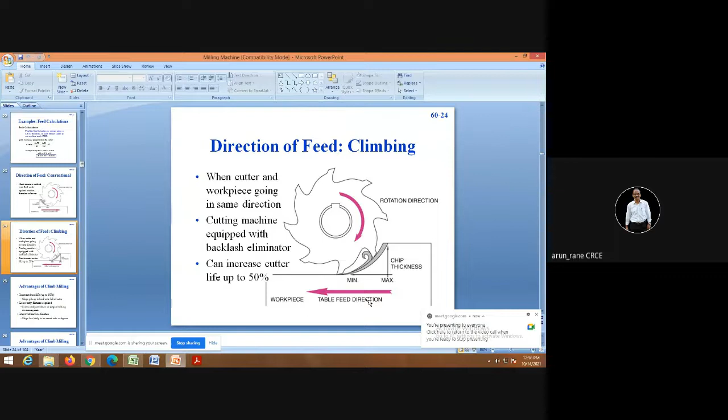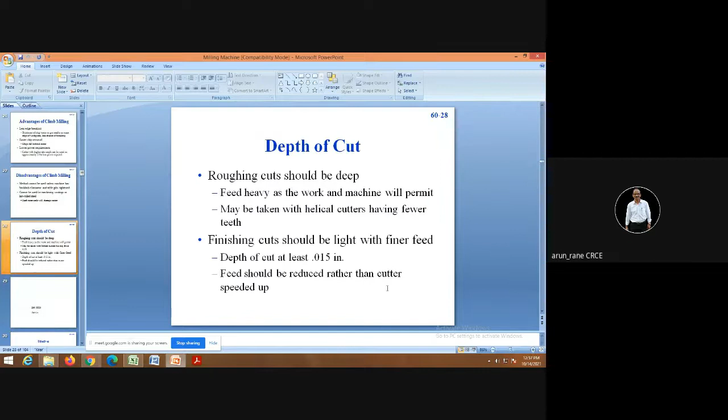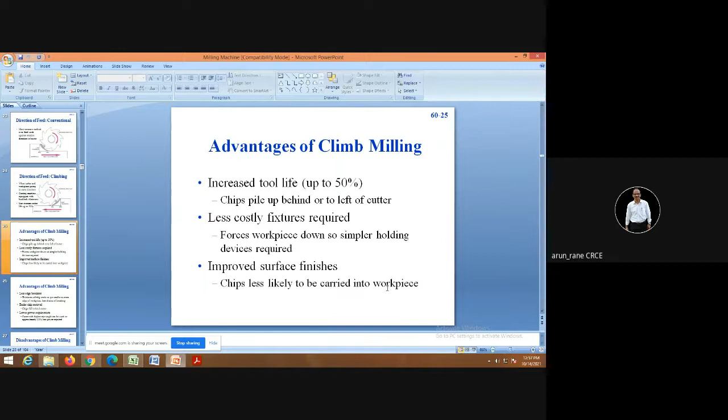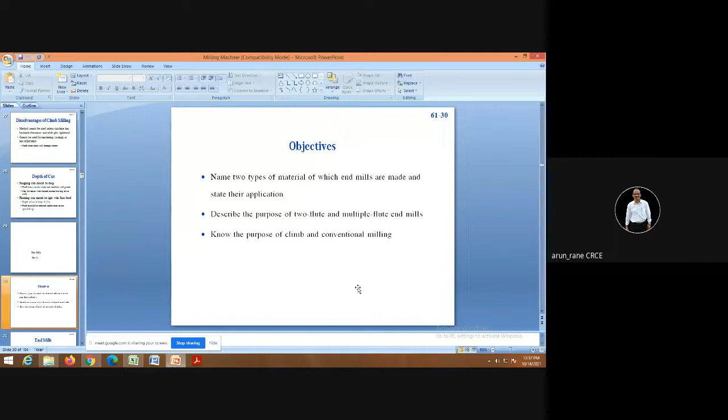We also discussed about the advantages of climb milling. As I told you, conventional milling is called up milling and climb milling is called down milling. So conventional milling is up milling, you have to remember that properly, and climb milling is nothing but down milling.

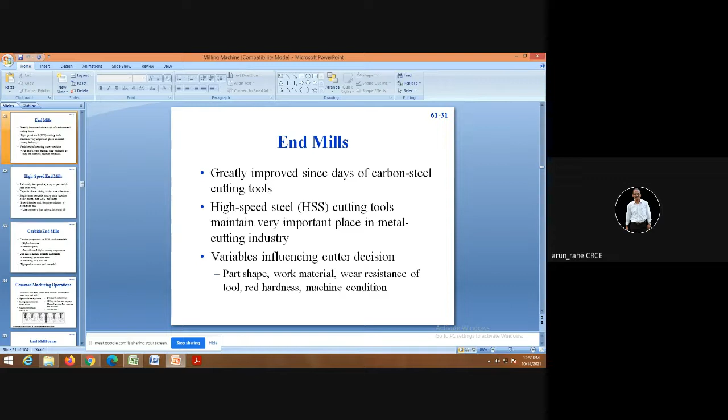These are the various cutters now. The very first and commonly used popular cutter is end mill. End mill is available in 2 flute and 4 flute construction, and the material also varies from medium carbon steel, high carbon steel, carbide, coated, etc.

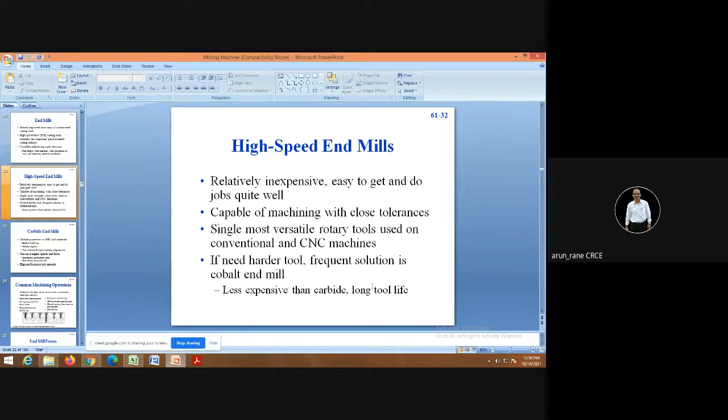Carbide end mills, again, can be completely solid carbide end mill or just coated end mills. Cost of the coated end mill is less as compared to solid carbide, because when I say solid carbide, the complete body is made out of carbide, generally tungsten carbide or titanium carbide. And when I say coating, that means the body is made out of high speed steel with a coating of carbide.

Usually the coating is of the order of 5 microns to 10 microns maximum, and it enhances the tool life as well as allows you to employ more cutting speeds and feed rates. These coatings are provided by PVD and CVD, that is physical vapor deposition and chemical vapor deposition. These are the two techniques used for coating.

So this is an option to reduce the cost. Balzers from Pune are the reputed coating tool manufacturers. There are many coating tool industries in Mumbai also, and even small scale and medium scale industries have set up coating plants.

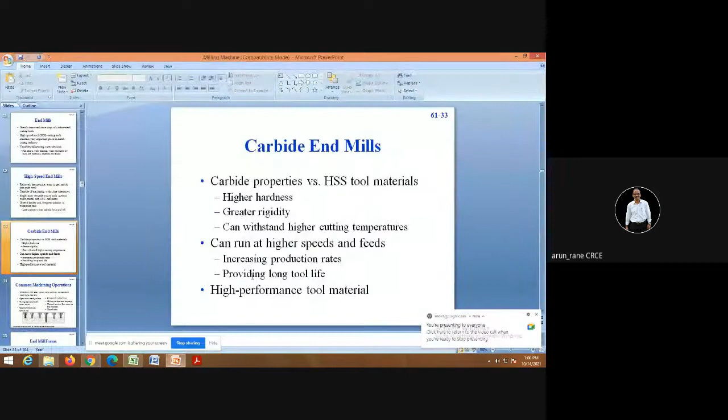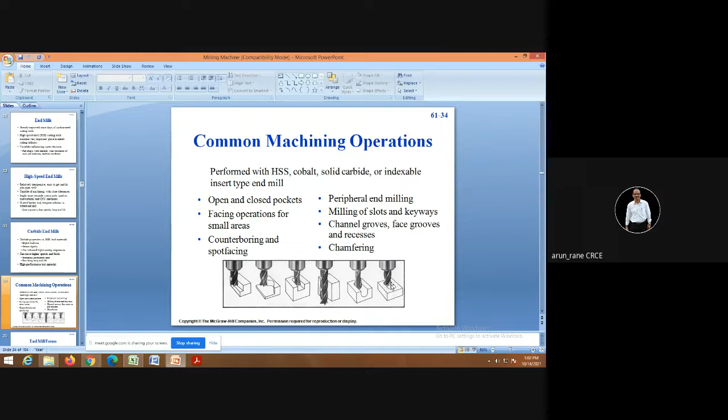There are different end mill forms, basically depending upon the surfaces to be milled. The two forms are ball nose end mill and bull nose end mill. Try to understand the difference between ball nose and bull nose cutter.

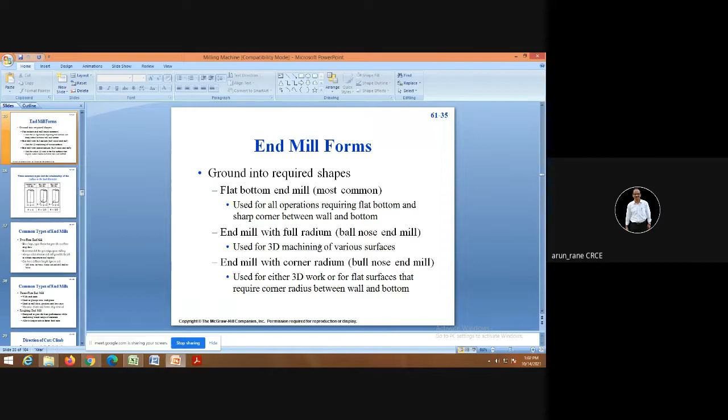In case of ball nose, the complete diameter is provided with the radius, and in case of bull nose, only the corners are provided with the radius. So this is the difference.

This is your standard flat end mill. This is ball nose end mill. And this is bull nose. So in case of bull nose, the radius is given at the corner. In case of ball nose, the complete diameter is provided with the radius, and flat end mill is perfectly flat or sharp.

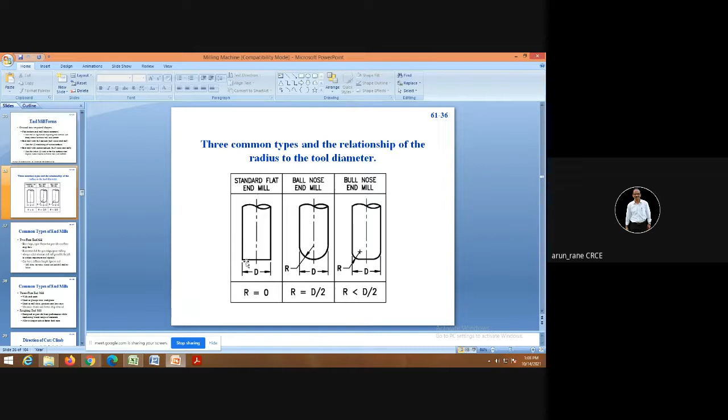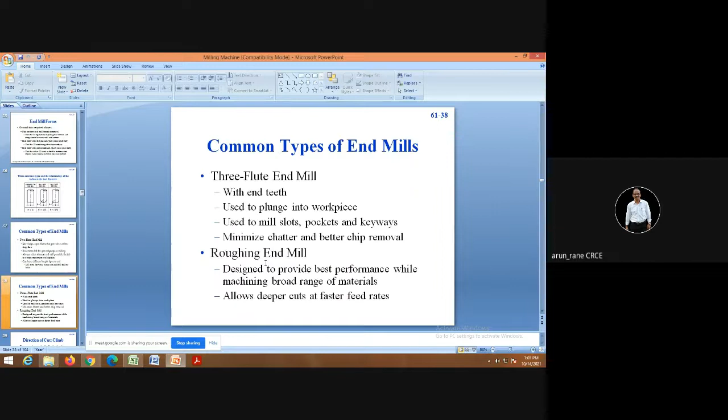These are the common types of end mills, that is 2 flute end mill, 3 flute end mill, roughing end mill, 4 flute end mill, etc. As I told you, there are two types of milling, that is climb milling and another is conventional milling.

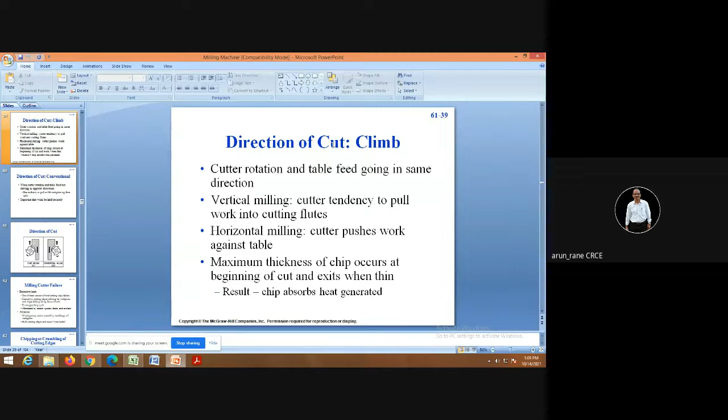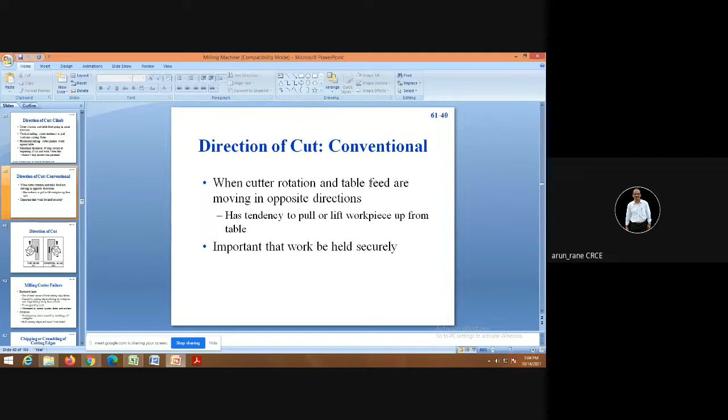Conventional milling is termed as up milling. These are the codes, G41 and G42, which are used in CNC. Now let's look at climb milling and conventional milling.

In case of conventional milling, the cutter will tend to lift the workpiece, so here the clamping has to be strong. Conventional milling is also called up milling.

This is climb milling, also called down milling. In down milling, the cutter will tend to sit the workpiece, so clamping requirement need not be strong.

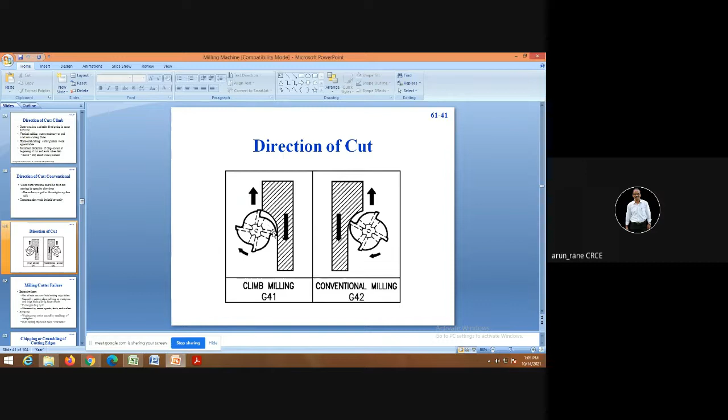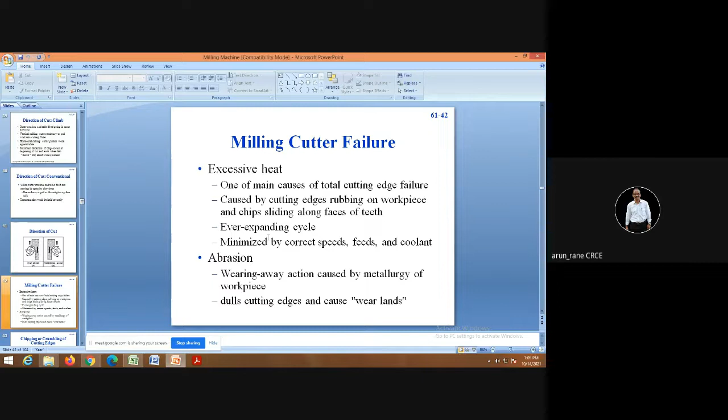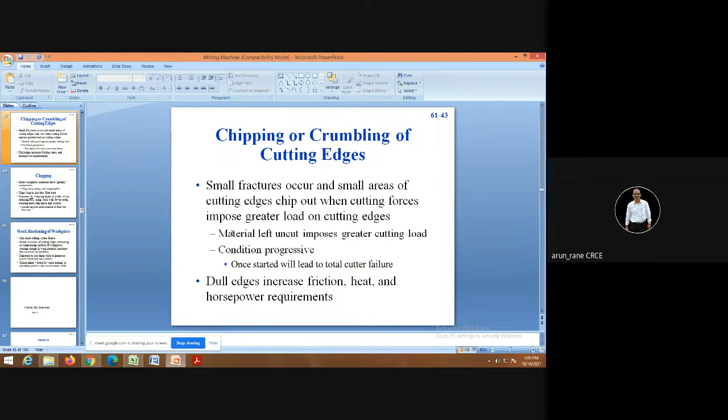Milling cutter can fail because of higher depth of cut, higher feed rate, higher cutting speed. All this will lead to excessive heat, abrasion, and cutting edges will get chipped off or crumbled. Once the cutting edges become dull, it will cause a lot of friction, develop heat, and consume more power.

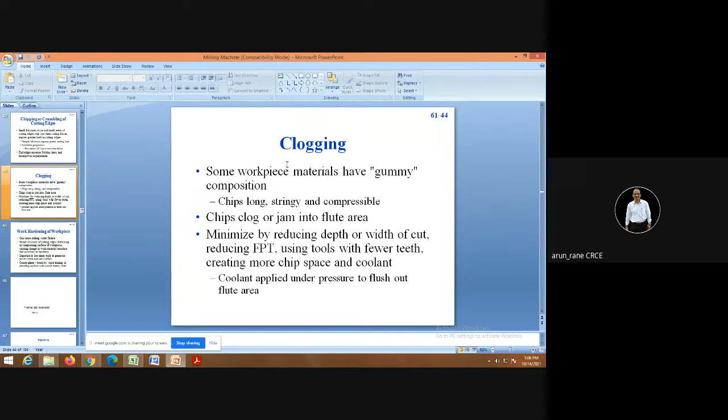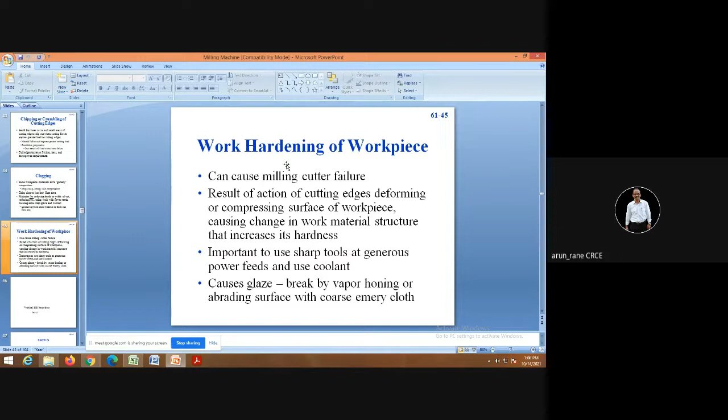The cutting edges also get clogged because of the chips, if the chips are not blown away properly with the coolant. That's why it is very important that chips should be flushed away properly, hence the coolant is required. The chips should not be embedded in the cutter.

Again, there are some alignments which are necessary. Most of the alignments are factory set. Like in case of vertical milling machine, the vertical head should be pakka 90 degree to the table surface. There is nothing like 0 0, you cannot have 0 0 in this universe, so it should be within 0.02 millimeter.

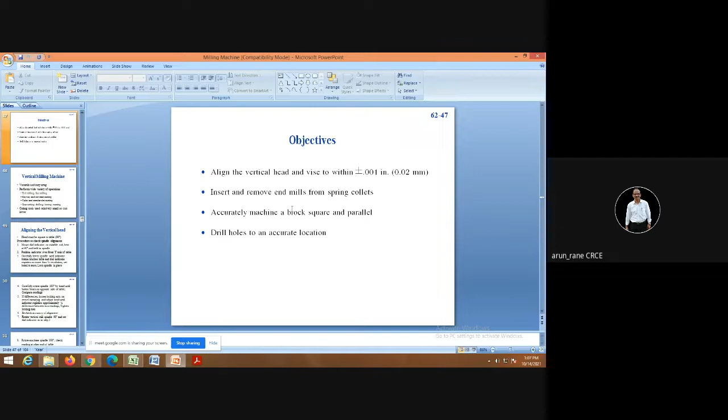Vertical milling machine is versatile, and you can do many operations. So in most setups, workshops or machine shops, the use of vertical milling machine is common.

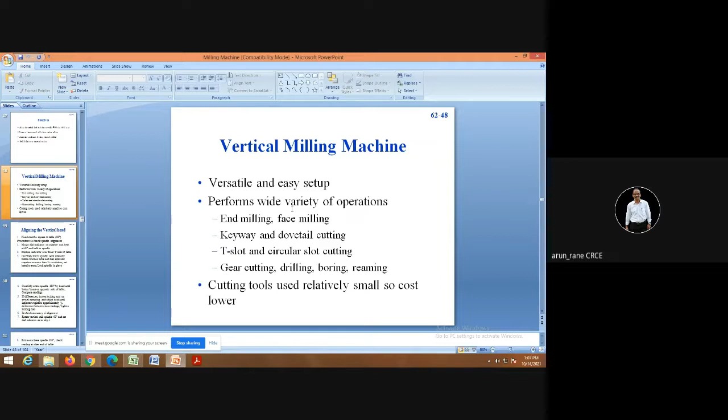So how to align the vertical head? You need to hold a mandrel in the spindle, and with the help of the dial indicator you have to move up and down and check the deviations. It should not be more than 0.02 millimeter.

Usually the vertical heads are factory set, but sometimes accidents happen, people dash the machine, and in that case the alignment goes and you need to realign. So either you can do it yourself, or you can ask maintenance people to carry out the alignment, or the last option is you can call the manufacturer's service engineer to do the alignment.

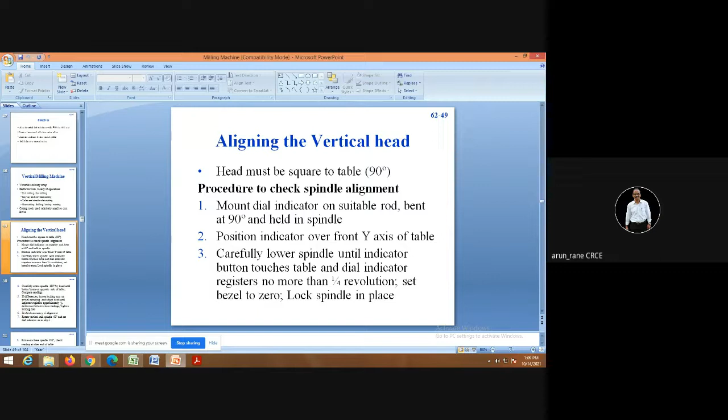So this is the procedure to do the alignment. Vice is used to hold a workpiece on the milling machine, and the vice face also has to be aligned. It should be parallel to the feed direction.

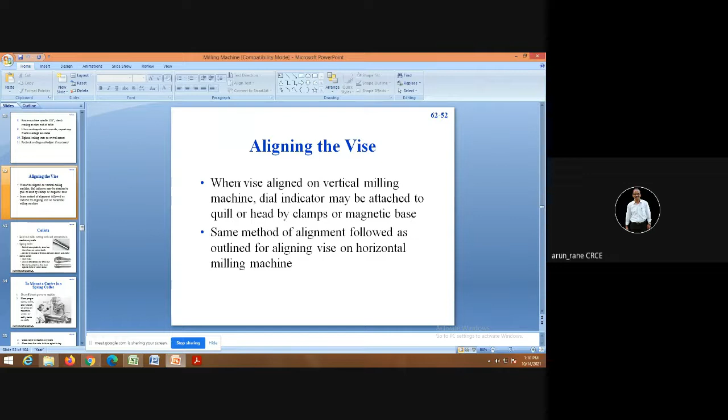Collet is used to hold the end mill, and collet gives a good grip across the circumference - that is one advantage. Another advantage is the cutter becomes concentric to the spindle axis - that is the biggest advantage. So you don't have to true the cutter.

Now you should not be confused. The collets are used to hold the cutters in case of milling machine, whereas in case of lathe machine, the collet is used for holding the workpiece or the round bar. The collets can be round, square, or hexagon, so it can hold a round bar, hexagonal bar, or square bar. In case of milling machine, again I am telling, the collet is used for holding the round cutters, majorly end mills.

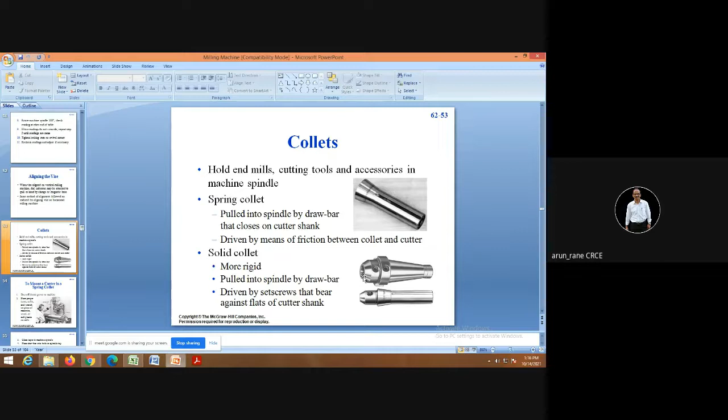Another disadvantage is that it cannot take variations in the cutter diameter. Like in spring collet, if I purchase the 20 dia collet, it can accommodate 19 to 21 mm variations, whereas solid collet can accommodate only the same size. Like suppose if this is 20, then it can take only 20 mm. If you try to fix up the 19 dia cutter, there will be a clearance of 1 mm, and your cutter will be out by 0.5 mm, 1 divided by 2. So your cutter will not be exactly in align with the axis of the spindle, it will be out by 0.5. So that is the disadvantage; side lock cutters or solid collets are used for the exact diameter of the cutter.

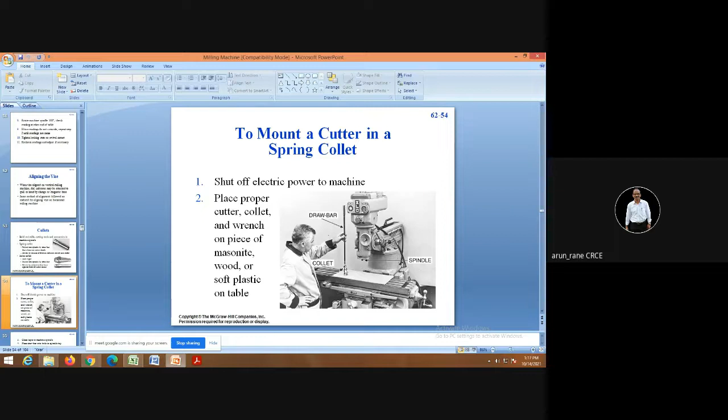How is the collet held? There is something called the drawbar. This is the collet which is threaded from the back side, and you have a drawbar to be inserted from the top, while the collet is inserted from down in the spindle. So the collet has threading here and the drawbar also has threading here. This threading goes inside the collet and holds it powerfully. And in the collet, as you know, the cutter is held. The purpose of the spring collet, or round collet, is to have a grip across the entire circumference.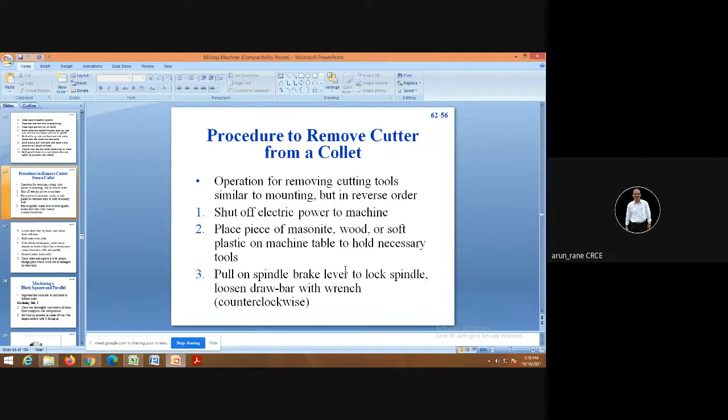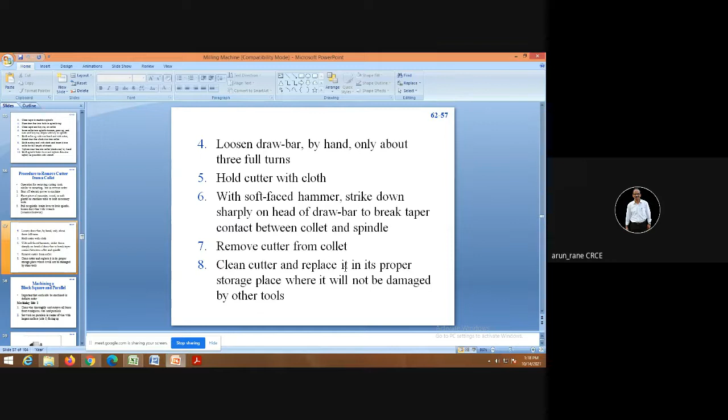Then if you want to remove the cutter, you have to adopt the same procedure: loosen the drawbar and hold the cutter carefully so that it doesn't fall on the workpiece table. Because if it falls on the table, or if you try to hold it by hand, your hand may get damaged or the table may get damaged, and obviously the cutter's cutting edges will also break.

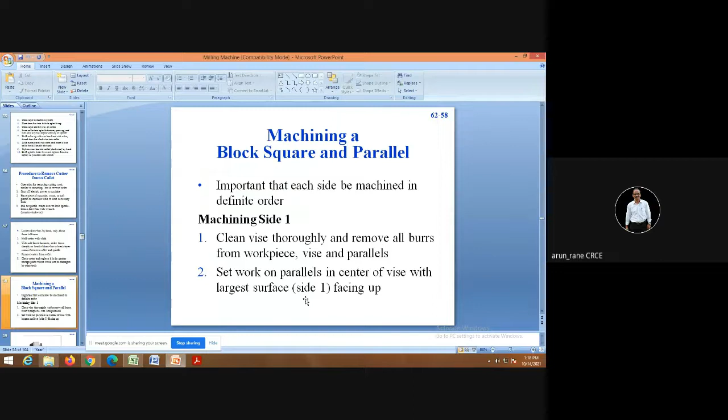The most basic or preliminary operation is how to square and make the faces parallel of a block. So these are the steps: you machine side one first. First, of course, you have to clean the vise, mount the vise, then align the vise properly. So this is step number one.

This is the workpiece which is held here. So first you face this. Then in the second step, you take this workpiece, align it here, and then mill this. Now what is happening is that this surface and this surface will be exactly 90 degrees to each other, because you have already aligned this face - this is the fixed face of the vise - and it has been aligned properly. So obviously this face will be perpendicular to this.

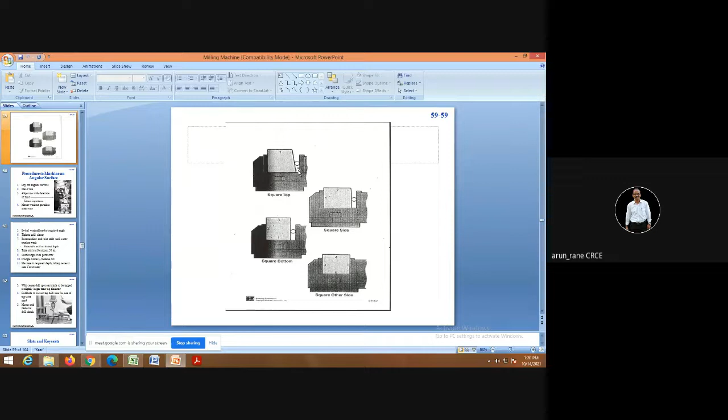Now once this is machined, coming to the third phase, we are doing machining from the top face. So now this face will come exactly parallel to this, because this is already machined, and this face will come 90 degrees to this face. And then now the last surface - here the reference is taken of this face and reference is taken of this face. So these two references have been taken.

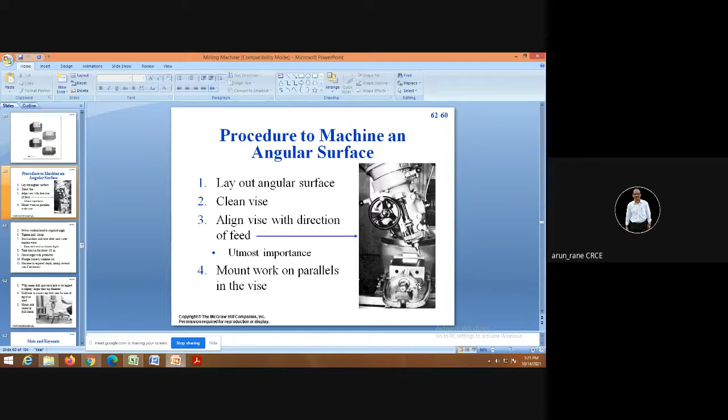How to machine an angular surface? There are two ways to machine the angular surface - meaning how to machine the surfaces at an angle. One way is you can tilt the head as shown in this diagram. Another way is you can tilt the vise, for which you need a universal vise. So there are two ways: you can either tilt the head or tilt the vise.

So you have to observe a very high degree of discipline, because an accident will happen only once, but it will cause damage to you. So you should be extremely careful.

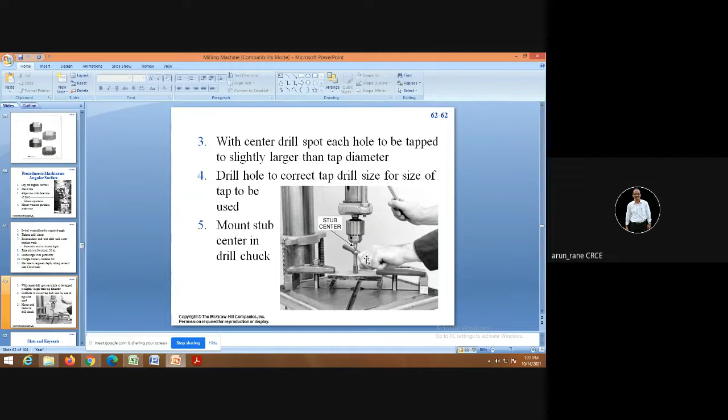Another operation which can be done on the milling machine is slot cutting and keyway cutting. There is a difference between slot and keyway. Usually keyways are blind, and of fixed width and length. It doesn't run through and through across the workpiece.

Through and through means, suppose if this is a 100 millimeter long workpiece, through and through means the keyway will run through entirely - that is not called keyway, it is called slot. Keyway means if this is 100 long, the keyway will be around 50 mm or 60 mm.

Now what will be the limitations? Keyway cannot have square ends at both sides. Whatever the cutter diameter, suppose if the cutter diameter is 20, you will get a radius of 10 at the end, whereas slots are through and through, so you will not get any radii at the ends.

So from a manufacturing or machining point of view, slot milling is always faster or more economical.

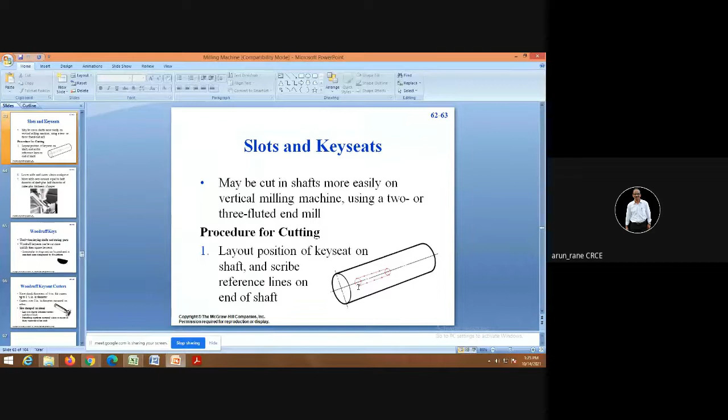This is how keyway milling can be done. You are holding a shaft in a vise - the shaft is mounted on a V block, and it is done with the help of an end mill.

The only problem is at the ends you will get the cutter radius. So accordingly you have to design the keys - the key will also have radius at both ends, or you can have the key length shorter, that is, you subtract the radius from both ends. For example, if the keyway length is 50 mm and you are using a 20 dia cutter, then 10 mm is lost on both sides, so you can have a key of 50 minus 20, that is 30, or 25 mm.

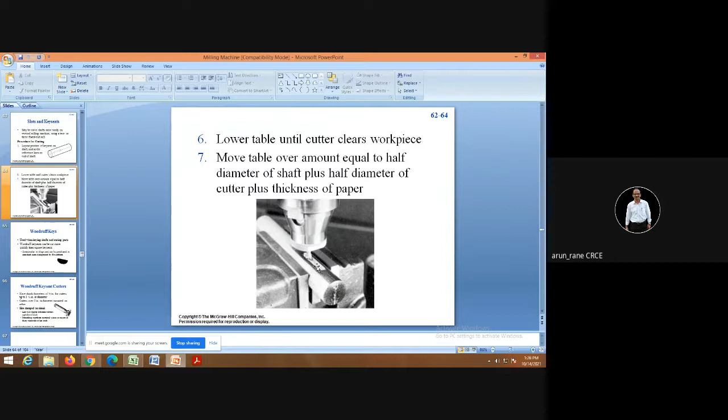Woodruff key is used for alignment. We have seen the application of the Woodruff key on the lathe machine in tool post when you have to align the tool center and the workpiece center.

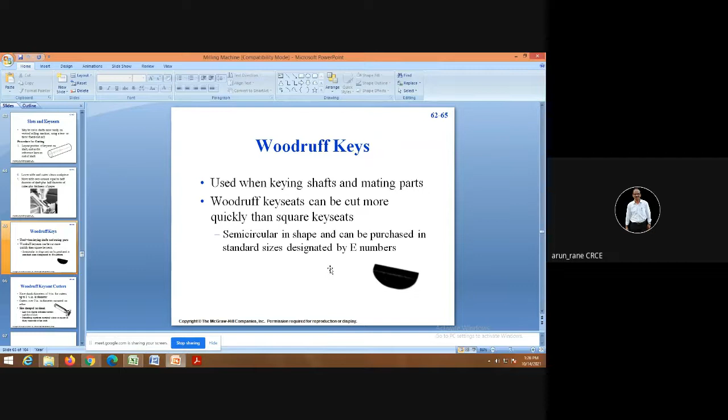Woodruff keys are preferred. How to cut the Woodruff key? It can be cut with the help of a T-slot cutter, commonly called a Woodruff cutter, or also called the Woodruff key seat cutter. This is how a Woodruff cutter will look like.

Either you can choose a vertical milling machine or horizontal milling machine, depending upon how you are going to mount the workpiece.

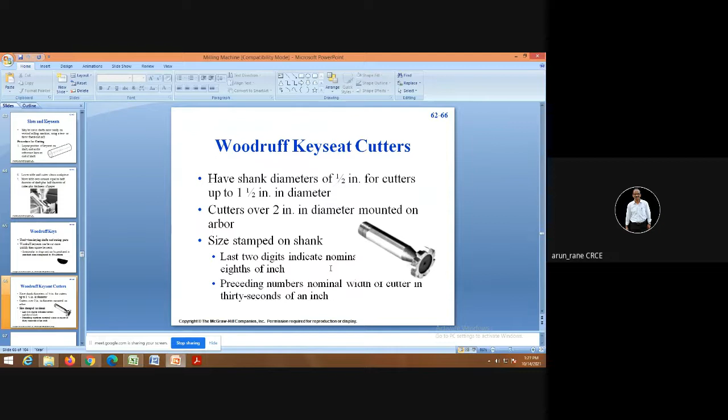Again, from an examination point of view, the questions that can be asked are: describe the types of milling machines, describe the various operations which can be performed on a milling machine, what are the different cutters used on milling machines - everything is included in this PPT.

Another question which can be asked is, what are the different accessories used on the milling machine? Because next to the lathe machine, the next popular machine is the milling machine. Of course, the lathe is called the mother of all machines because it can do turning, milling, grinding, drilling, slotting, gear cutting - almost all operations, obviously with the help of attachments.

Whereas on a milling machine you can also perform various operations, but it has limitations - like turning, you cannot perform on a milling machine very easily.

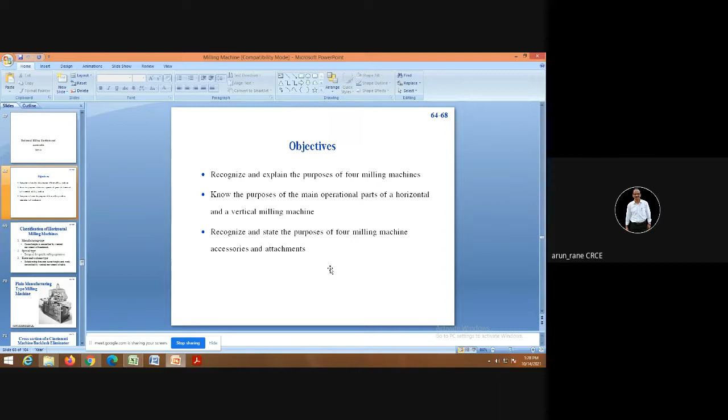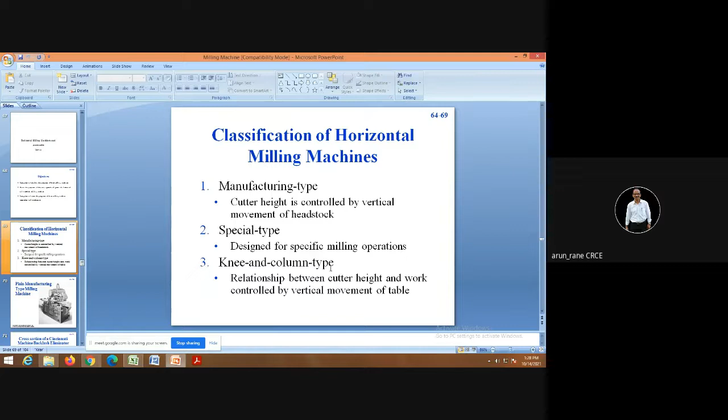How to classify the different horizontal milling machines? It is based on manufacturing type, special type milling machines. Knee and column type milling machines are most commonly used in workshops.

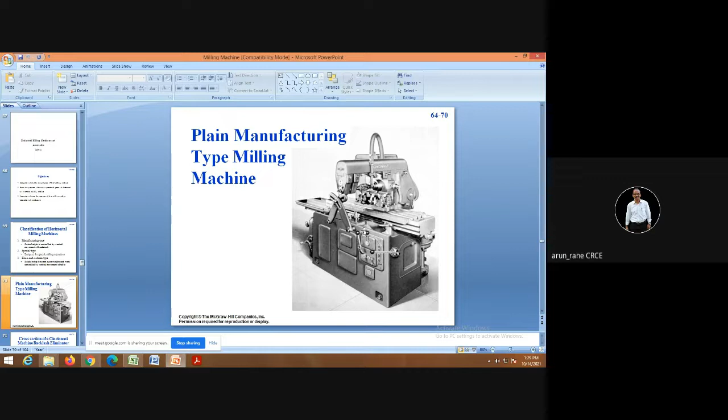There is something I call the backlash eliminator, that is used while doing down milling, because in down milling operations the cutter tends to seat the workpiece, so the clamping force required is less, but there is a tendency to pull the screw because of the backlash.

In order to reduce or eliminate this backlash, of course you cannot make backlash zero, because if there is no play between a screw and nut, there will not be any movement, it gets locked. At the same time you should not have more backlash, because then the movement will be loose. So you should have a proper backlash.

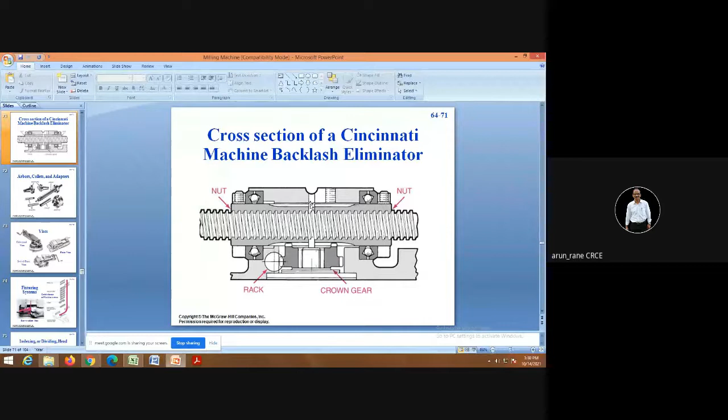Excessive backlash can be prevented by a backlash eliminator, a device that comes as an accessory which needs to be provided on the milling machine, especially when down milling operation is performed.

These are different accessories like the arbor, used mostly on horizontal milling machines. These are called adapters, used for mounting face mill cutters. Adapters come in two tapers, ISO 40 and ISO 50. These are the commonly used tapers, also called BT 40, British tapered, or BT 50.

These are sleeves, generally used for the drill chuck. Suppose the drill chuck has one taper, but the milling machine spindle taper is bigger - how do you bridge the gap? That can be bridged using sleeves, which act as an intermediate piece between the drill chuck taper and the spindle taper. You mount the drill chuck in the sleeve, and the sleeve with drill chuck goes as one piece inside the machine spindle.

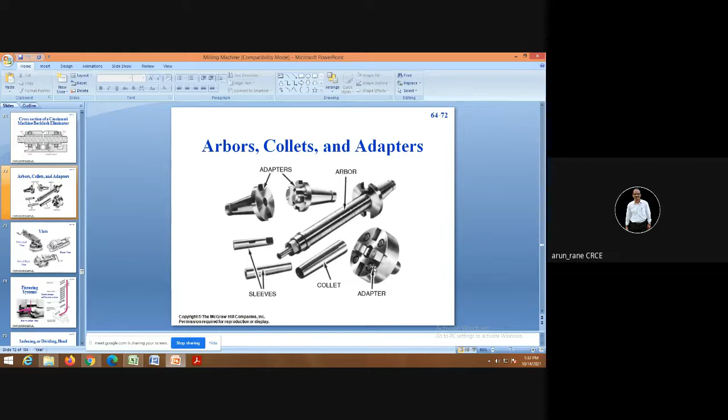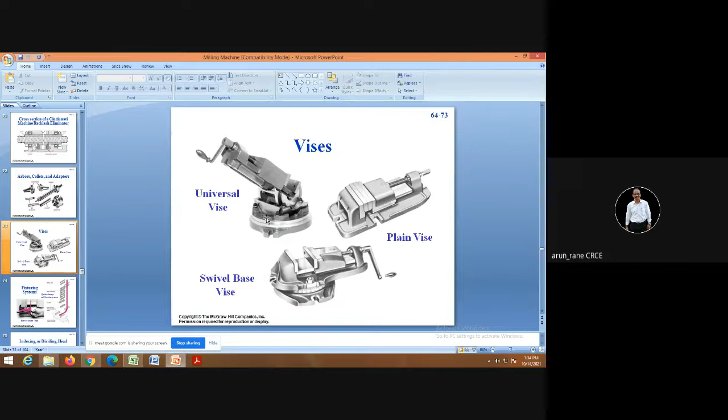Look at this - here the vice can be rotated about this axis. Then it has two more swiveling bases, one here and another here. So all three planes - XY, XZ and YZ - it can be rotated. Machining at any angle, not just one angle but two or three angles simultaneously, can be performed with the help of a universal vice.

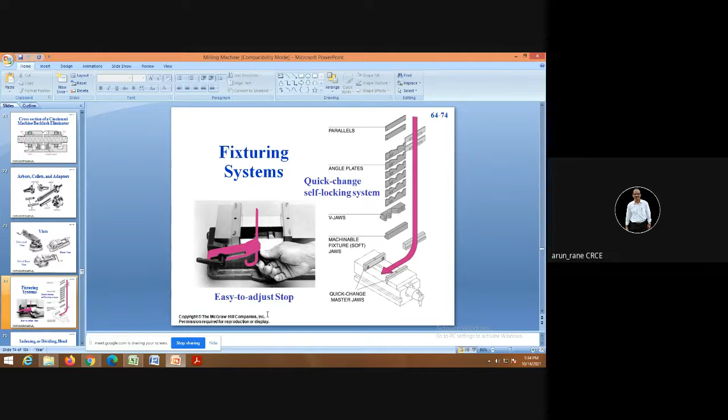There are standard fixtures available in the market which are rotary tables, circular tables, and standard XY tables, which have drilled and tapped holes for clamping.

Indexing and dividing head is the most important accessory used on the milling machine. The purpose of indexing or dividing, as the name suggests, is to divide the periphery of the workpiece into equal portions. Suppose you want to cut four splines or four teeth, then you need to divide the workpiece at 90 degrees - that is, 360 divided by the number of cuts.

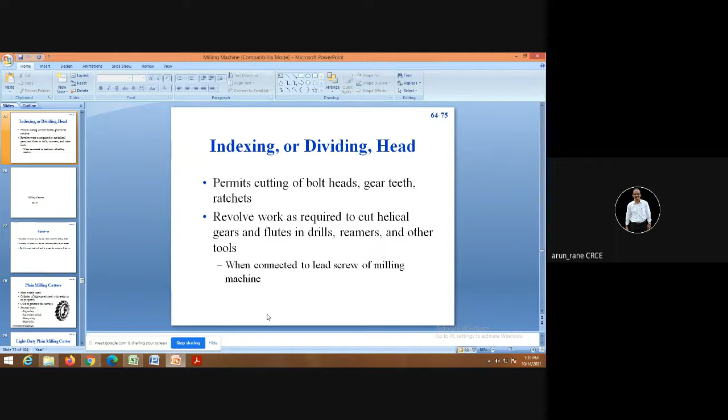And there are different types of dividing heads. We will continue our journey in the next class. If you have any doubts, please ask, or else we can stop.